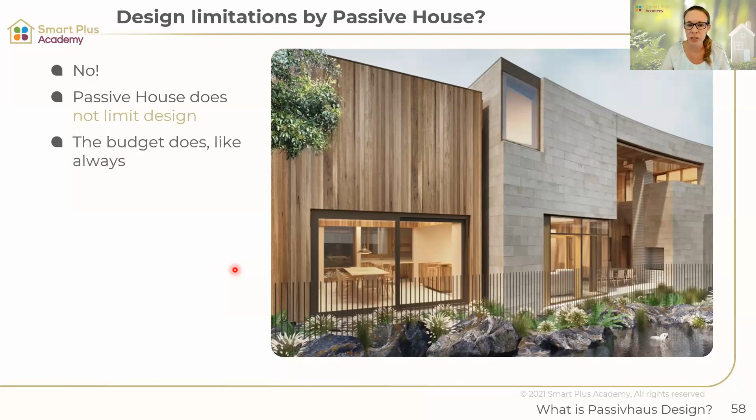So studies have shown that Passivhaus can cost up to 20% more. However, if we're looking at architectural features, they regularly exceed 30% of the build costs. So it really is all your architectural features that can really blow up the budget. So Passivhaus doesn't need to be expensive. It can actually be on par with our conventional buildings.

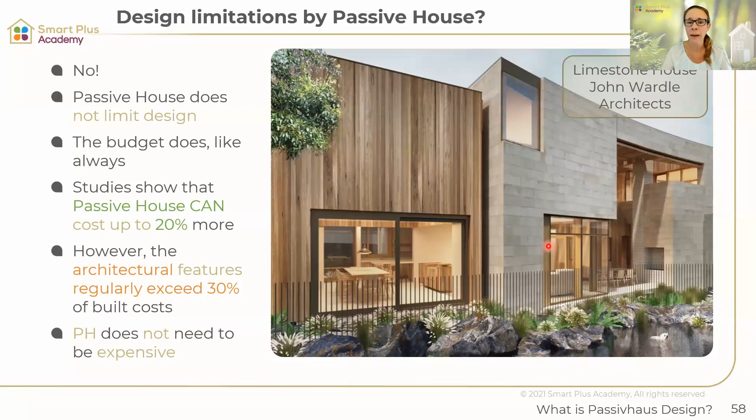We've got here an example of the limestone house of John Wardle Architects. Now you can see this is a beautifully architecturally designed building. It is a certified Passivhaus, and you can see all those features that would add to the cost. It's not necessarily the Passivhaus standard that makes it expensive. It's the architectural features.

Also, I want to remind you that Passivhaus is team play. This is really important. Passivhaus design is a team effort. And what we say to everyone always is get all important parties involved as early as possible. So have your certifier, your Passivhaus designer on board from the get-go, your architect, your builder, and all your engineers. That would be ideal, because then everything can be detailed and set in stone before the construction starts. That avoids disappointment later, that avoids complications later. So this is really what you want to do.

What often happens, and you might have seen that if you are from a building professional background, is that the architect designs a beautiful home, like the fairy dream castle for their clients, and the clients really fall in love with that design. And then they get a cost estimate, they present that to the client, and it's over budget. But because they fell in love with this design so much, they don't want to let go of that.

And the first things that are always going are your energy efficiency measures. It's your thermal insulation, it's your double glazed windows, it's your air tightness that will go, because these are the things that we don't see, but they are so important to implement at the starting phase of your build, because later on it's not economical to exchange your windows in 5 years. This has to be done now. Please get all your team involved, make sure that your design is in budget, and then present it to your client.

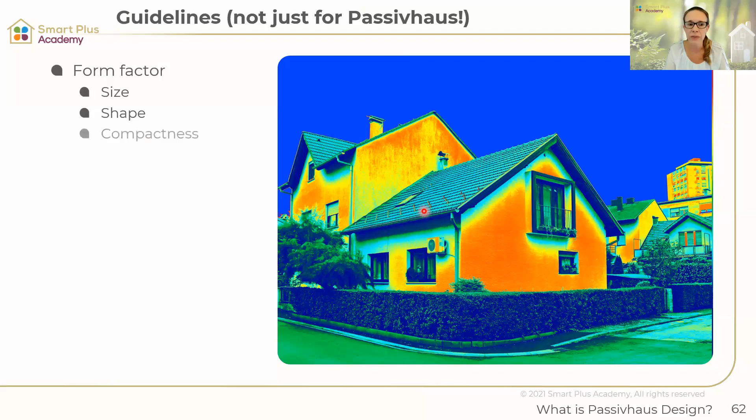Good. Then other guidelines, not just for Passivhaus, but really something that can make a big difference in your design is the form factor. So you want to look at the size of your building, the shape of it, and the compactness of your building. Then you want to work with the sun. So you want to know how many windows, how big windows you have, what the shading situation is like.

So shading is really, really important, especially if we are living in a warmer climate, like most of us here in Australia are. We want to have the shading right so that we avoid overheating in summer. And what is the orientation of our windows? So where do we put them so that we can make the most use out of them?

Good. Now we want to talk a little bit about those different guidelines or those different factors, and I'll shed a little bit more light on why they are so important, because I think we have talked so much about the Passivhaus components and we know about them. So in our last unit, we talked about the 5 Passivhaus components. We understand what they do.

So we've got our thermal insulation, our air tightness, our Passivhaus windows, our thermal bridge-free design, and our mechanical ventilation system. So we understand what they do. But before we implement them, we have to look at the basic layout of our building. And that's what we're doing now, because that plays a big role as well.

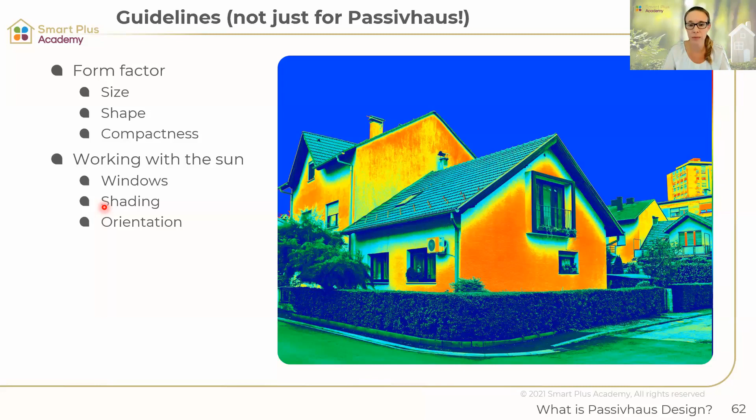The running costs, because if we have a bigger building, we need more energy to heat and cool it, to condition it. So we need more money to run it. And on sustainability as well, for all the above reasons, more material, more energy used. So size is really a big factor.

And the problem, I think, is, especially in rich nations, developed nations like Australia, house sizes are really, really big. So we all want that prestige. We want to have, I don't know, 400, 600 square meters for our family. I think that's something that we've sort of grown used to. And Australia has one of the biggest house sizes in the world.

And if you're looking now at what Passivhaus recommends, or at least the Passivhaus Institute, yes, it comes from Germany, where living spaces are generally a little bit smaller. Passivhaus recommends 30 square meters per person for a home. Sounds probably a bit crazy, but if you think about it, for 4 people, that would be 120 square meters. That's a very typical home in Germany, where 4 people would comfortably live.

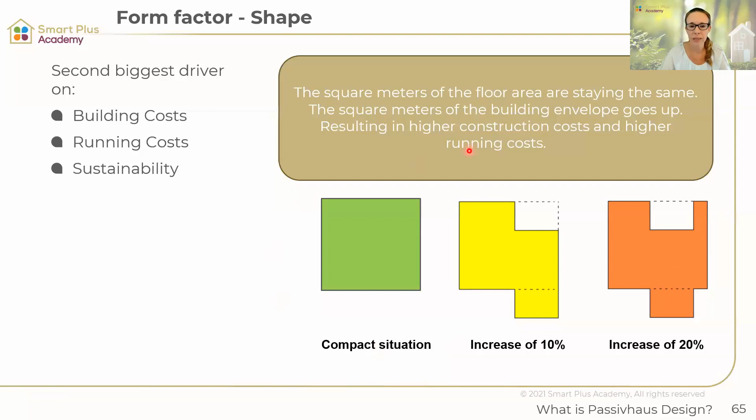So our square meters of the building envelope go up, and that is then causing us higher construction costs and higher running costs, because now we have more envelope area where energy could get lost. We're not gaining any square meterage. We're just gaining a little courtyard or something that is also more complicated to build. Corners are always the ones that are complicated to build. Maybe we end up with some unusable space. So keep that in mind. Keep your buildings simple, in a simple form.

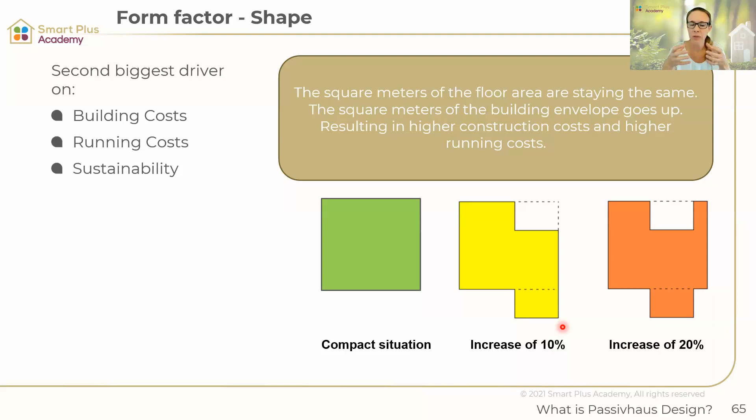If there's a certain timber that's prevalent, if there's some stones or some typical building methods, then use that to make it a feature. Or use some external features, some external balconies, something that you thermally separate from your indoors, roofs, balconies that are only attached with a point, use different material claddings. All of that can be used in a passive house without having an influence on the shape and on the performance of the building. So make it interesting that way, rather than making it a complicated shape. It will also be cheaper to build, less problems on site. So all up, it makes it a lot easier.

And then compactness is our third biggest driver on building costs, running costs, and sustainability. So here it's a little bit similar to shape, but with compactness, we're talking really about making it compact, as in, for example, don't build a long, narrow shape, but maybe rather put a second story on and make that building compact in itself. Again, that saves on our external envelope and saves us money on the running costs and on the building costs.

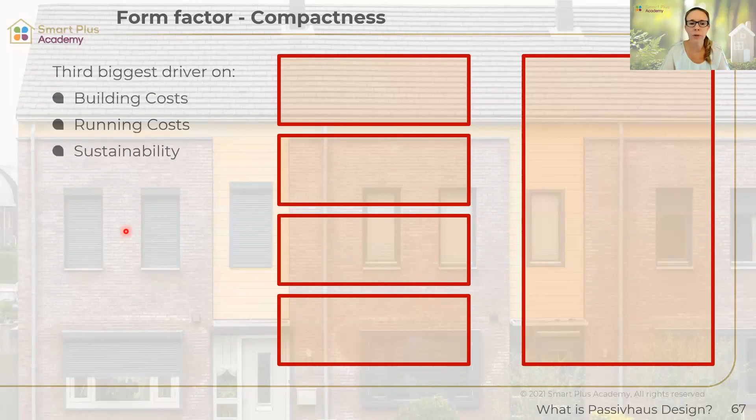So here, if we're looking at this as a scenario of a terraced house, if we have shared walls in the middle, then we can massively reduce our building costs, because we're saving here on those external walls, as you can see in between those dwellings, and we can save on the running costs, because now we have an internal wall instead of an external wall, and there we're not losing energy to the external environment.

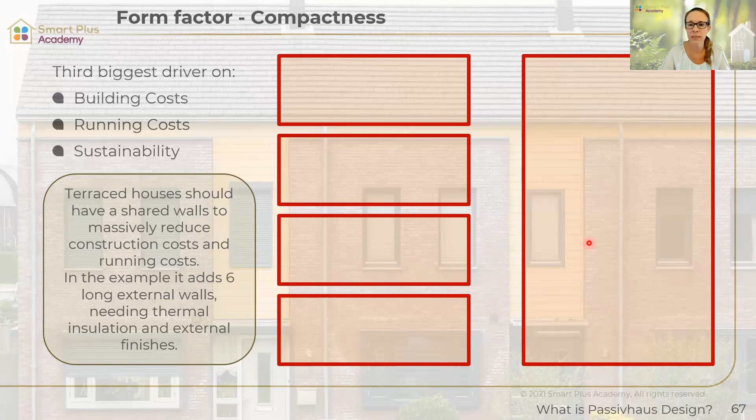So our form factor, that's what we are talking about here. Our form factor is the surface area of the building envelope compared to our building volume. So less area where the energy can leak out is better. So if we're looking at this factor here, the more compact buildings, like apartment buildings, are better in the form factor. If we're going to more spread out buildings, then that form factor is less ideal, and we're losing more energy.

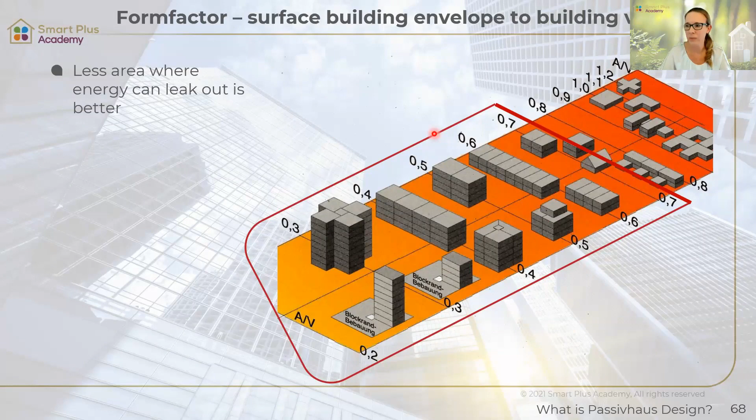So yeah, I already said that. Less area where the energy can leak out is better. And for apartment blocks and commercial buildings, passive house is easier to achieve. So we always say bigger buildings are easier to achieve, because we already have that compactness. Usually that also gets cheaper per square meter.

Also the air tightness is easier to achieve because we have less envelope area. So all of that gets a bit easier when we're coming to those bigger and more compact buildings. Good. So these are the influences that we should consider before we start our passive house design.

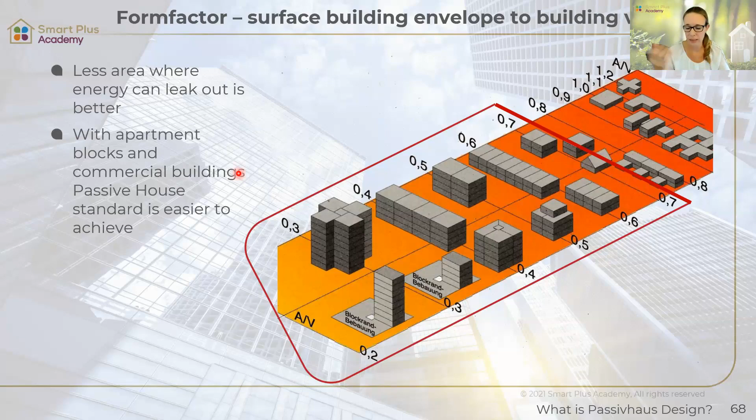And now that you've learned this, and that you've hopefully also listened to my previous units about what the passive house standard is and how to do the 5 components, we really see that passive house makes so much sense. I really believe that passive house only makes sense. There's nothing that should stop us. But what is actually stopping us from doing this? Why is not everyone going for Passivhaus? We've got here a few ideas of the things that could hold us back.

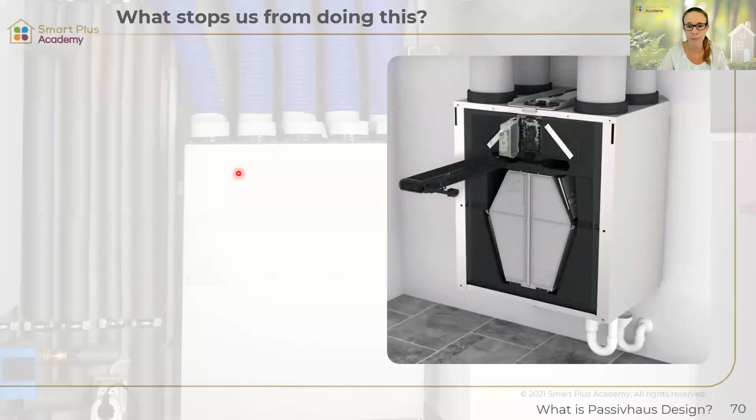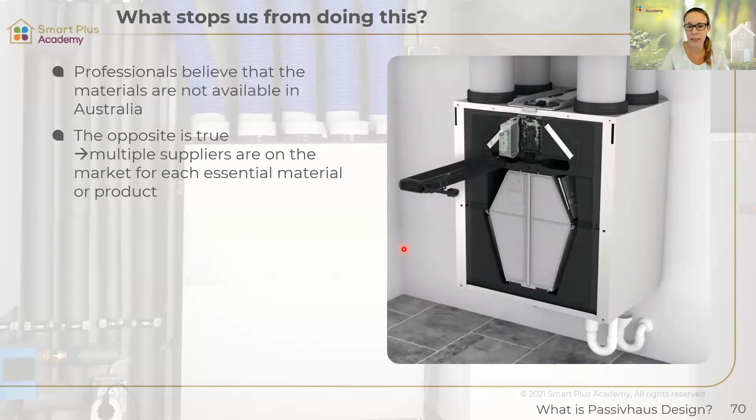One of the things is that maybe some professionals believe that materials are not widely available in Australia, but the opposite is true. We have multiple suppliers on the market for each essential material or product, also to cater for various budgets. For heat recovery ventilation systems, we have Stiebel Eltron, Zehnder, Villavent, Brink, all readily available here in Australia. For air tightness systems, we have Pro Clima, Siga, Rothoblaas, we have OSBs. All of that can be used. You find the right supplier for your needs.

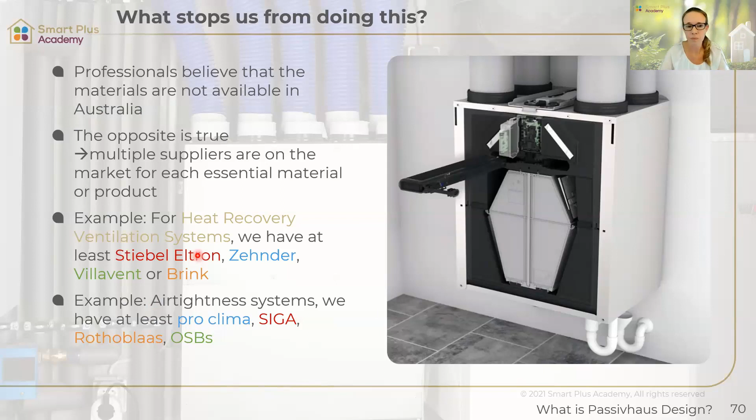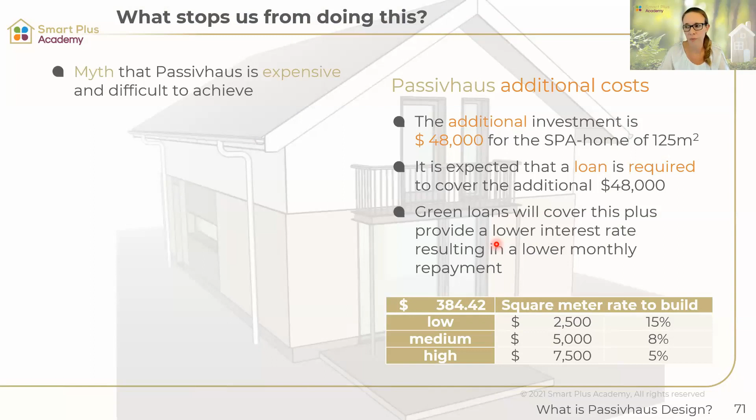The second thing that we often hear stops people from going Passivhaus is the myth that Passivhaus is expensive and difficult to achieve. That's probably one of the biggest ones. And yes, we might have to pay about $250 to $700 extra per square meter to bring us to the Passivhaus standard. But really, it's not that much for what you get. As a reminder, we're getting a healthy home that's comfortable and sustainable, and we can't really put a price on our health.

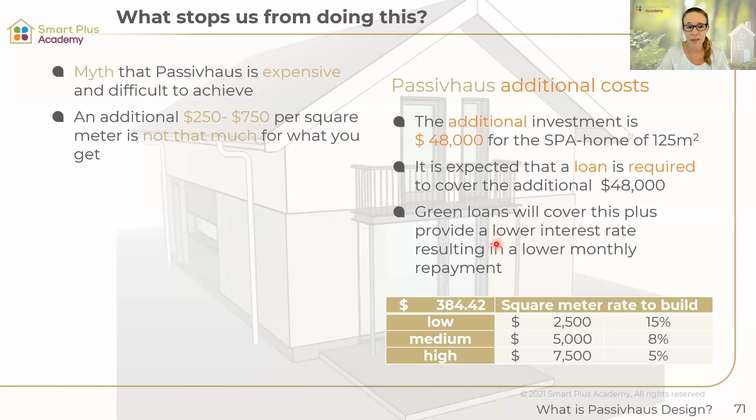And for that amount of money, we really want to build quality, a home that would stand there until the end of your life, a quality build long into the future. The other thing is we now have incentives and green loans where we could have a return on investment on the Passivhaus from day one. So whilst we may have to spend a little extra money initially, with a green loan we might now be on par with conventional construction, if not better off.

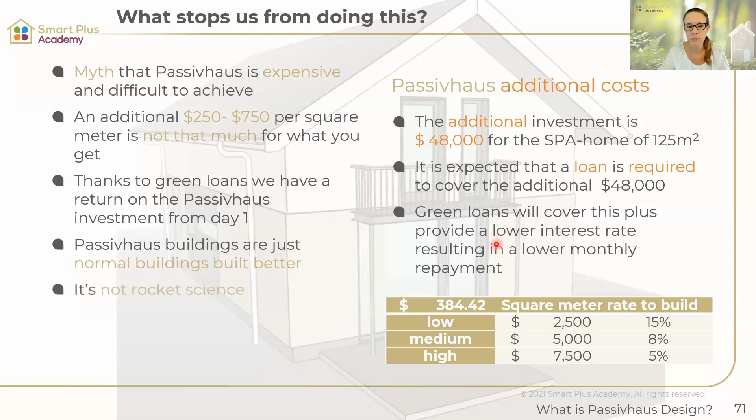So please listen to our presentation about finance. We've got that as CPD points, I think number 5 in our series. There we talk all about green loans and how to finance Passivhaus, and how you can get away with no extra cost from the first day if you find the right loan. So Passivhaus are just normal buildings built better. You get the extra quality and you may not even have to pay extra for it. It's not rocket science.

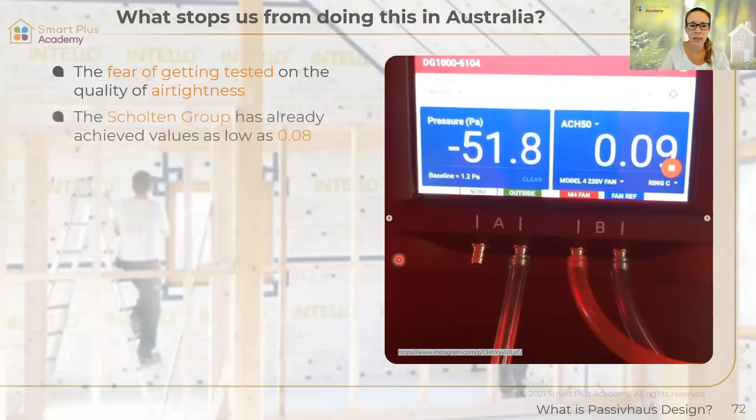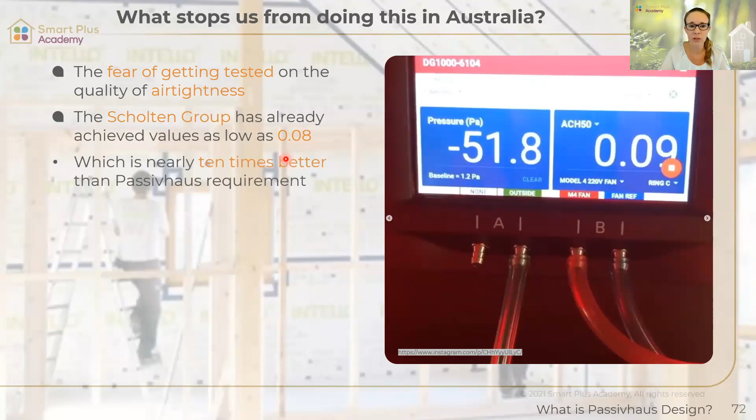The third thing that could stop people from going Passivhaus is the fear of getting tested on the quality of the air tightness. People say it might be too hard to achieve; 0.6 sounds pretty low. But professionals are getting more and more proficient and achieving amazing results. The Scholten Group has already achieved values as low as 0.08. The Passivhaus standard asks for 0.6 air changes per hour, not 0.06, so this is nearly 10 times better. And they say 0.6 wasn't hard at all; with a bit of planning, it is easy.

So that's what we're always saying: planning is crucial. Plan your air tightness system. Know what you want to do at each of the corners. It also comes with experience, so for your first Passivhaus, maybe get an experienced air tightness installer, watch them and learn. The next one will be easier and easier. It's a learning process, but you will get better with each Passivhaus you build. So hopefully those aren't hurdles anymore.

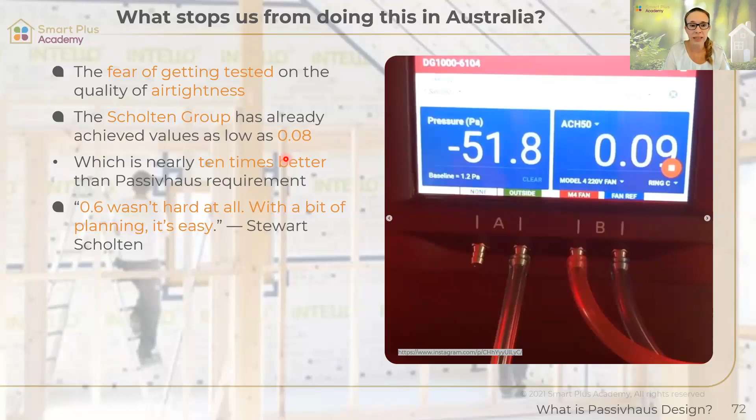Now we come to a little conclusion of our course about what is Passivhaus design. And the first thing I want to say is, what is the right question?

So for me, the question is not if Passivhaus is economical or if my client will be happy with a slightly smaller home. For me, the question is, can we afford not to go for efficiency? Can we stay energy dependent on nations or on leaders that don't have our values? Or can we keep destroying the planet and let our children figure it out? Can we afford not to go for energy efficient buildings? And for me, that's a no-brainer.

Passivhaus or beyond should be what we're striving for. For me, there's no question at all. Because as a reminder, there is no planet B. Earth is our only home. If we want life as we know it, we need a climate as we know it, and we've already destroyed so many things. We caused many extinctions. Now we're tampering with the climate.

And if we want to change that, the last IPCC report from 2022 says that it's now or never if we want to limit global warming to 1.5 degrees. Without immediate and deep emissions reduction across all sectors, it will be impossible. And because buildings have such a big impact on greenhouse gas emissions, there's a big opportunity for us.